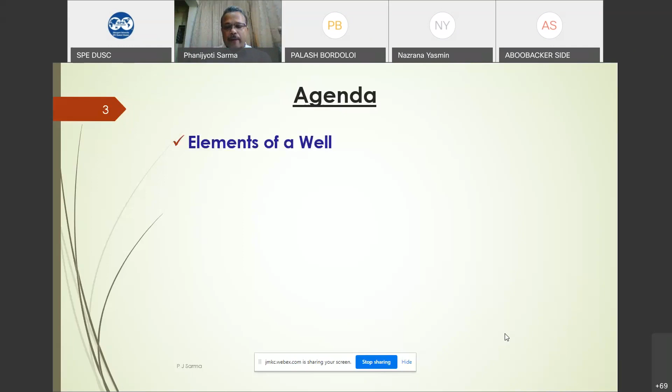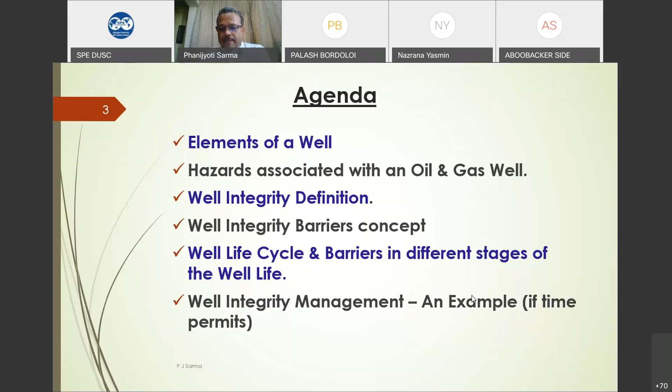The well integrity definition, well integrity barrier concept, well life cycle, and barriers in different stages of the well life cycle. And finally, well integrity management with an example if the time permits.

When you say annulus, annulus is between the production tubing and the production casing. Hello, am I audible to everybody?

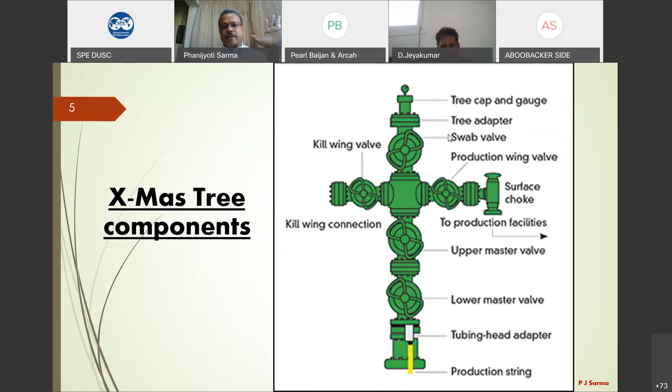So before going to well integrity and barriers, we also need to know what are the hazards associated with an oil and gas well. Unless we know the hazards, we will not be able to do the mitigation process. So it is very essential to know what hazards are associated with the oil and gas well, and then based on the hazards, we make the mitigation plan, the barriers, and the well integrity concept.

So one of the hazards associated with oil and gas is the pressure. And when we talk about pressure, which pressure are we talking about? This is the formation pressure, wellhead pressure, or the pumping pressure during the various stages of the well intervention process.

Second hazard could be the temperature. As you go down from the surface to the formation, the geothermal gradient increases, meaning the temperature is increasing. So wellbore equipment has to be capable of withstanding the different temperature regimes during the different stages of well life. During the drilling phase, the well will see cold fluid; however, during the production phase, the well will see hot fluid. So there will be temperature fluctuations, and we need to ensure that our wellbore equipment is robust enough to handle the temperature hazard.

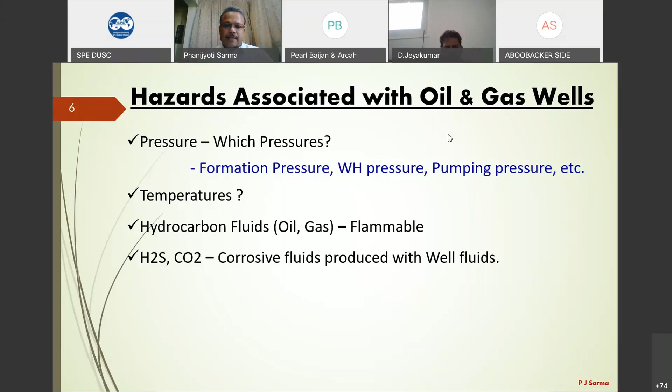Other hazards include the hydrocarbon fluid itself. These fluids are volatile, these fluids are flammable. On top of that, some formations produce corrosive fluids like H2S or carbon dioxide, which are not only corrosive but also poisonous and a health hazard. We have also observed that some formations produce naturally occurring radioactive material, for example barium sulfate, which is also a health hazard.

Drilling fluid, when we are drilling a well, itself consists of various chemicals which are hazardous to the people and hazardous to the equipment we are using. The stimulation fluid could even be acid. So these are the hazards, and based on these hazards, our well should be designed in such a way that it is capable of handling the hazard, and we have the right barriers in place.

So here is a pictorial representation of some of the hazards. You can see an old well which is not connected, meaning it is not producing, probably abandoned, and you can see certain parts are missing—look at the wellhead, no annulus valve is available. However, I can clearly visualize that the production packer is holding, and that's why there is no leak from the annulus side; that's my guess. And if you look at the production side, there is an oil spill happening, and the whole environment is creating a hazardous situation.

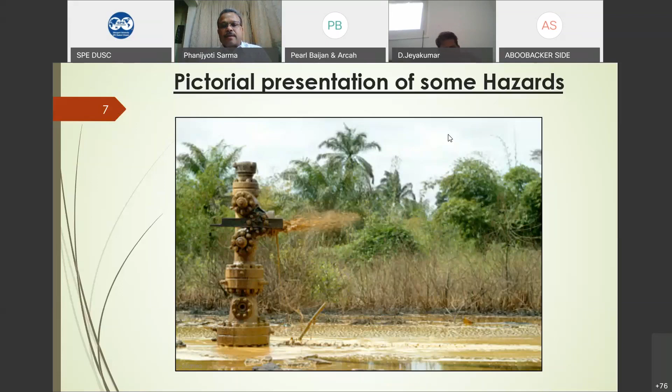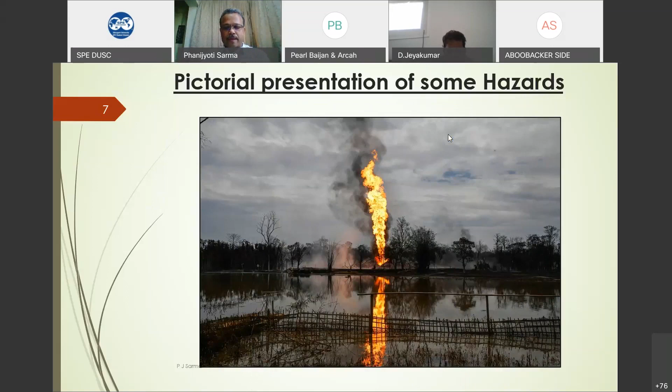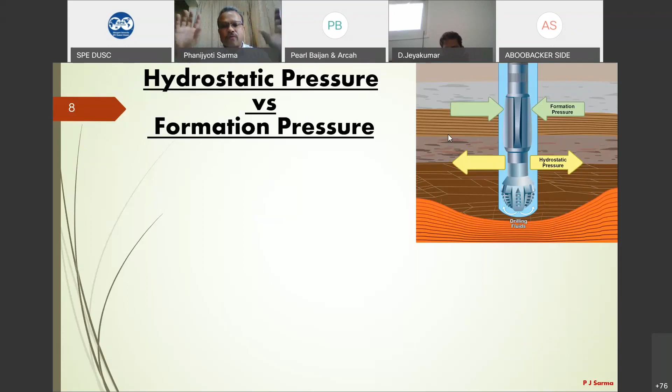Next, the hydrostatic pressure and the formation pressure. The formation is always trying to come up, and hydrostatic pressure acts during the drilling phase. So we have to ensure that our hydrostatic pressure overcomes the formation pressure, so that we can control the formation and the well without allowing the formation to flow to the surface during the drilling phase.

This is a simple calculation for the hydrostatic head. So how do you estimate your mud weight? It's the true vertical depth multiplied by the mud weight in ppg, multiplied by the constant factor 0.052, which gives you the hydrostatic pressure in psi. That's how you can estimate the mud weight required to successfully drill a certain formation.

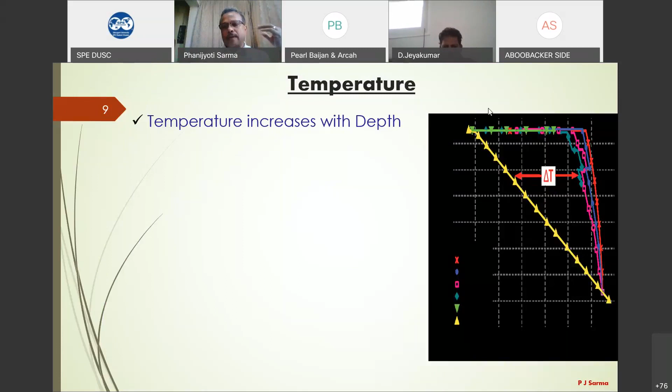Temperature increases with depth, as you can see in this graph. The yellow graph is the geothermal gradient, and it is gradually increasing from the surface to the bottom.

But during the production phase, all the wellbore equipment will be exposed to the production hot fluid. As a result, the temperature in tubing and in different annulus, all the metallurgies, will be increasing, and that is depicted by different curves over here.

What does that mean? Our well equipment will be exposed to different temperature regimes at different points in time: cold fluid during the drilling or intervention time, and hot fluid during the production time. Our equipment has to be capable of handling such a harsh environment, which needs to be considered during the design phase itself.

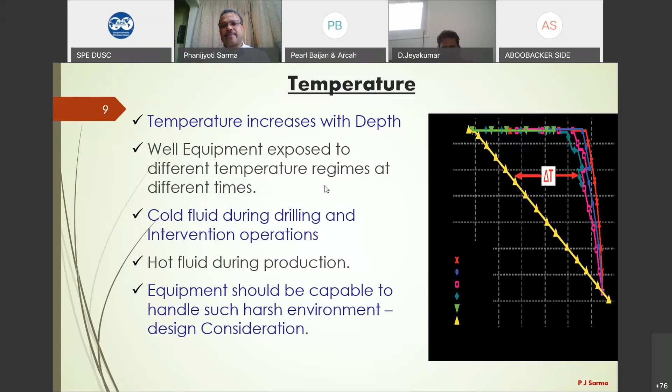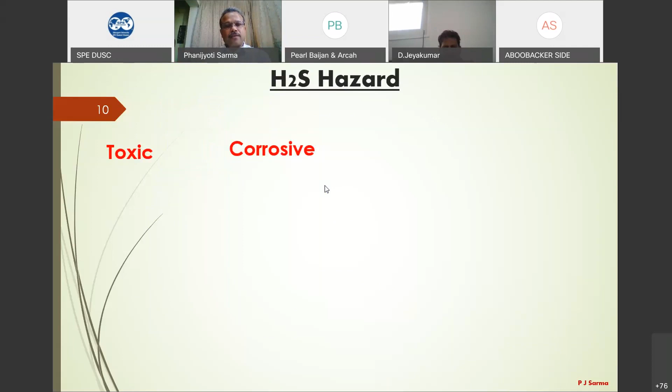H2S hazard is very toxic and deadly. It is also corrosive, and H2S can corrode all the equipment if it is not properly designed. It is also flammable, so if you ignite H2S, it produces sulfur dioxide, which is again a health hazard.

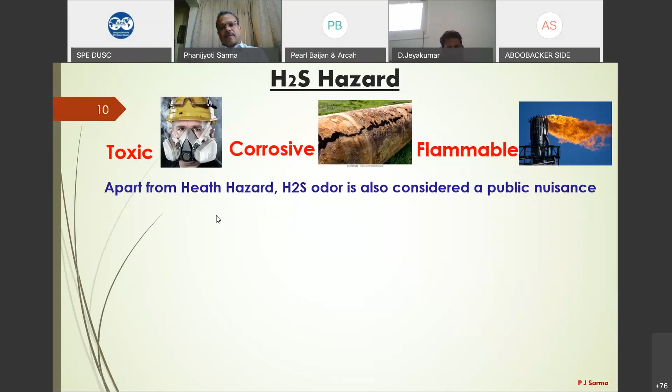The smell is like rotten eggs, and you can smell it only if the H2S concentration is less than a certain percentage.

If the H2S concentration is less than 10 ppm, people can work in that environment for up to close to about 8 to 10 hours.

However, if the concentration is between 10 ppm and 15 ppm, it is called moderately dangerous, and people can probably be exposed in this environment for not more than 2 hours.

But as soon as the H2S concentration increases beyond 15 ppm, then it is dangerous.

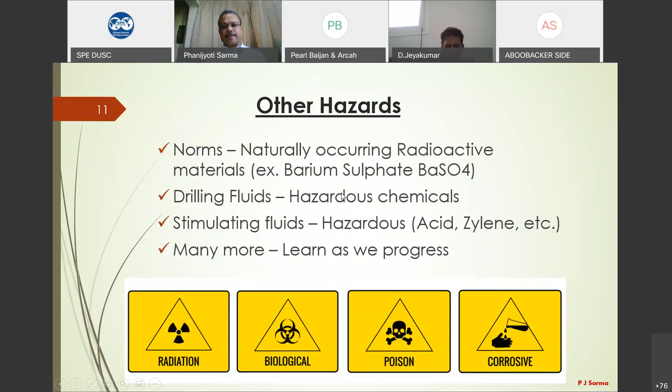Other hazards, as I talked about, include NORM (naturally occurring radioactive materials), drilling fluid, stimulation fluid, and many more. As we progress, we will be learning more. So that covers the hazards and the consequences of the various hazards.

Now, what is the well integrity definition? There are different definitions of well integrity. As per NORSOK D-010, well integrity is defined as the application of technical, operational, and organizational solutions to reduce the risk of uncontrolled release of formation fluid throughout the life of a well.

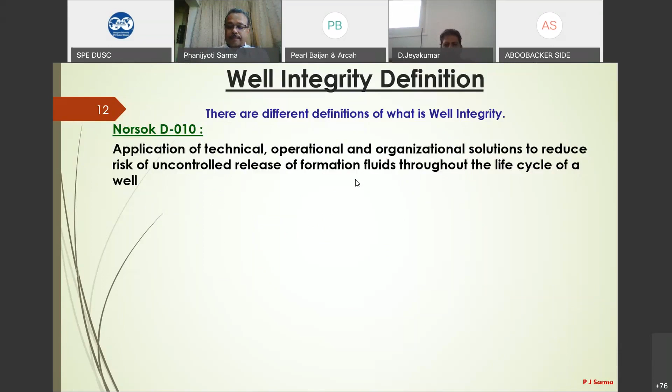As per ISO, well integrity refers to maintaining full control of fluids within a well at all times by employing and maintaining one or more well barriers to prevent unintended fluid movement between formations with different pressure regimes or loss of containment to the environment.

OISD is an Indian regulation. It defines well integrity as the instantaneous state of a well, irrespective of purpose, value, or age, which ensures the veracity and reliability of barriers necessary to safely contain and control flow of fluid within or connected to the well. So in a nutshell, the well integrity definition refers to containment of hydrocarbon fluids by having the appropriate barrier.

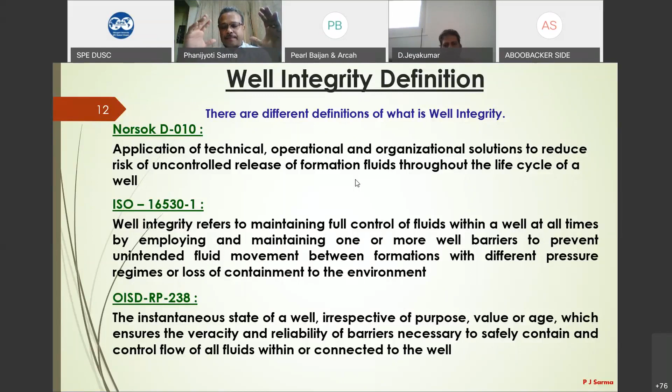In the subsequent slides, we will be talking about the barriers. As NORSOK and other standards describe, the well integrity barriers are the technical barrier, which is the well itself, the plant; the operational barrier, the procedures; and the organizational barrier, the people.

It is not at all possible to have zero loopholes; there will be loopholes in the technical barriers, in the operational barriers, and the organizational barriers. However, if all these loopholes get aligned, then the reservoir and all hazards will be exposed to the environment, and the accident happens.

Because of such failures, various blowouts and incidents have occurred, one of which was the Macondo Deepwater Horizon. It happened in 2010. 3.19 million barrels of oil spilled into the Gulf of Mexico, 11 people lost their lives, and there was a huge financial loss of $65 billion US.

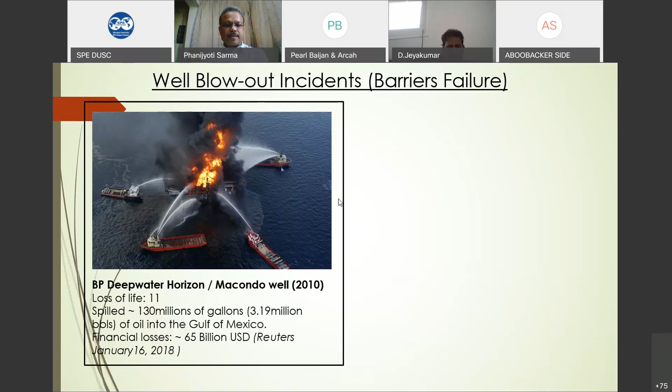So there are many instances of well integrity barrier failures while working on or operating a well. We need to have the barrier concept very clear, and we need to have the process in place so that at all times we maintain the barrier. That is where the concept of the well integrity barrier comes in.

So what is a well barrier? A well barrier, in general, is an envelope of one or several dependent wellbore equipment, preventing fluids or gases from flowing unintentionally from the formation to another formation or to the surface. And at all times, we need to have two barriers in place.

I think some noise is coming from somewhere.

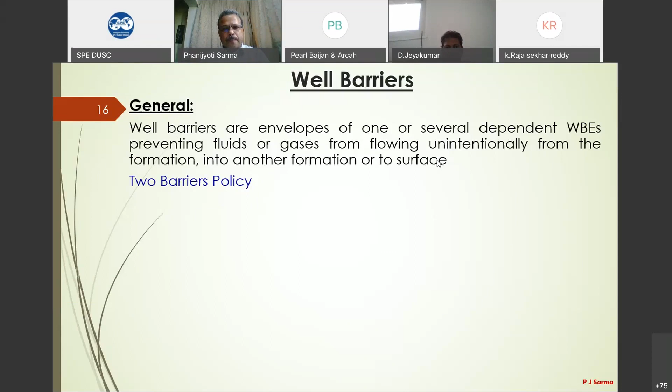Okay, so barrier types: the primary, the secondary barrier. What is the primary barrier? It could be the fluid column, or it could be a mechanical barrier which provides protection against unintended flow of the hydrocarbon.

The secondary barrier is activated when the primary barrier fails. That means when the primary barrier fails, the hazard is coming through the primary barrier, and the secondary barrier now gets activated and protects.

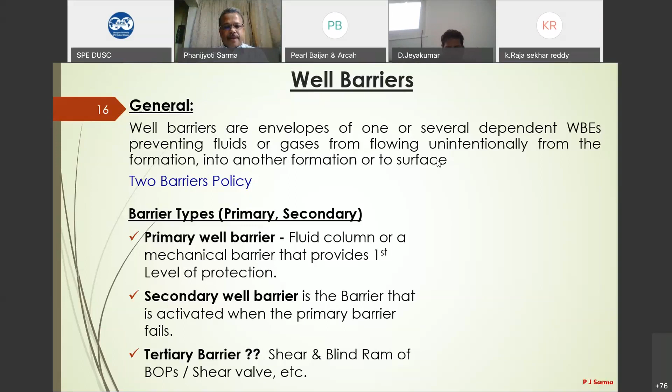There is another barrier which is called the tertiary barrier. Tertiary barriers are nothing but the shear and blind ram of BOPs or shear seal valve, and these tertiary barriers are used during well intervention, be it rigless or rig, during the drilling time, during the workover time, or during the well intervention time.

So well, the formation is always trying to come out once the barrier has failed. And what are the barriers? The casing, the cement, the wellhead. During the drilling time or during the intervention, the BOP and the rams, the tubular itself, the safety valve - it could be the downhole safety valve or the surface safety valve. And choke and kill line valves during the drilling or intervention time, and Christmas tree valves during the production time.

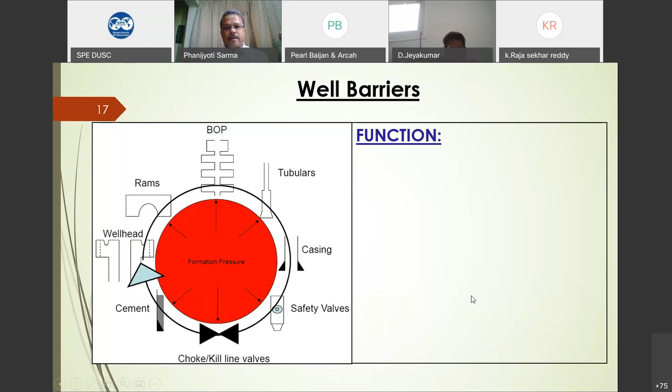So the function: it prevents unintentional flow of fluid from the formation to another formation or to the surface. That is a function of the well barrier. The second function is shutting the well during an emergency situation. And the main function is it secures the well integrity. When we talk about well integrity, we are talking about the well health.

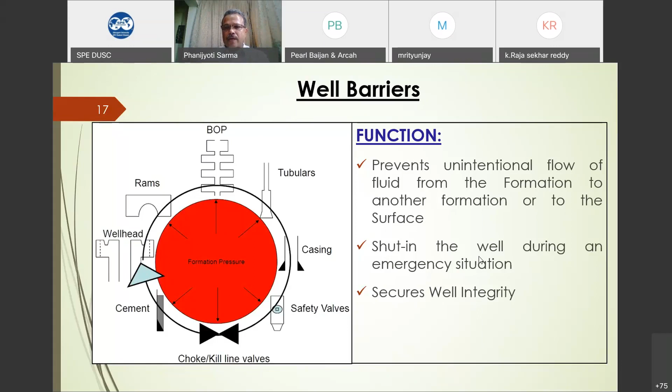Now the well undergoes different life cycles. As I said, the well life cycle starts at the design phase and it ends in the well abandonment phase. In the design phase, we need to define the various parameters based on the hazards. Once the well is designed, it goes for construction, using the rig to construct the well. That is the second phase of the well life cycle.

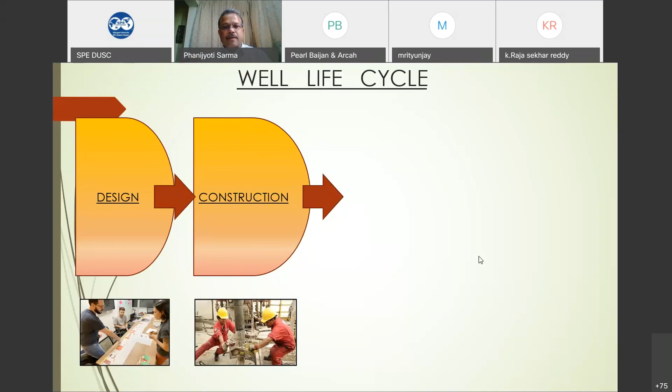The third phase, once the construction is done and completion is put in, is the production phase, and this is the longest phase of the life. Various interventions are done either to enhance production, maintain the well, or rectify certain mechanical failures. Once the well life cycle ends, it goes for abandonment, where we need to permanently abandon the well. So the well life cycle starts at the design phase, then gets executed in the construction phase. The longest life is the production phase, and then the abandonment phase.

Now, during the various different phases or stages of life, the barrier concept changes. So I will go through the various stages of well life and what are the barriers.

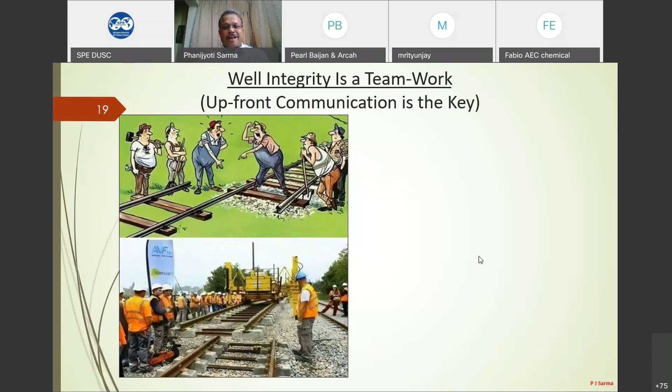Well integrity is teamwork. It is not just the job of the well integrity engineer, and people cannot work in silos. If you work in silos, this could be the end result - like the cartoon, and it is not just a cartoon, exactly this kind of situation has happened in real life. So it is an integrated and interactive approach consisting of drilling engineers, completion engineers, the subsurface team, the surface team, and the service providers.

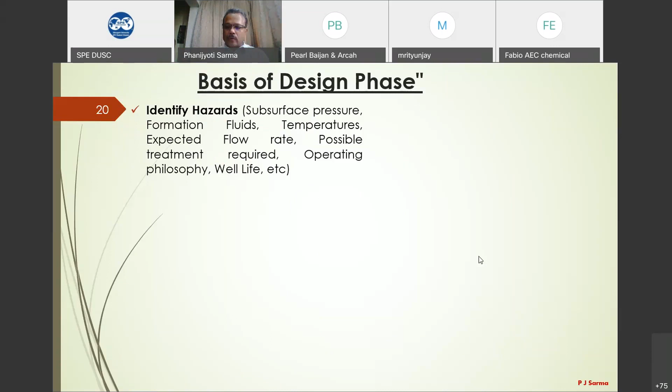So the design phase - what do we do? In the design phase, we need to identify the various hazards: subsurface pressure, what formation fluids we are going to handle, the temperatures, expected flow rate, and possible treatment required during the well life cycle. Also the operating philosophy - once we identify the hazards, we identify the philosophy, then we design the basis of well and design the tubing.

Once we design the tubing, then we can design the casing. Our casing should be capable of handling whatever jewelry we are going to put in the tubing. Based on that, the casing size is determined, and based on the lithology and depth, the various stages of casing are designed. The wellhead is designed too. We also need to identify what will be the artificial lift during the production phase, and whether we need any additional treatment to enhance production, maybe fracturing or stimulation. These are the factors that need to be considered during the design phase itself.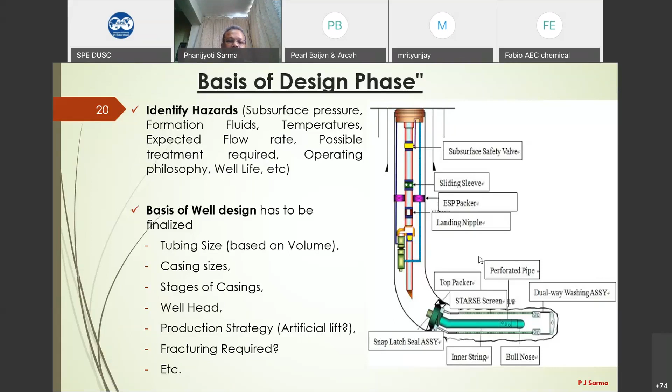And once the factors are identified, then we need to determine the various operating envelopes during the well life cycle. How do we determine the various envelopes? The maximum surface pressure, what we are going to see in case of complete evacuation, in case of any failure. How much pressure do I need to pump to kill the well? Do I need to have a provision for fracturing? If yes, what will be my fracturing pressure? So all these factors determine the maximum working pressure of the wellhead and the tree.

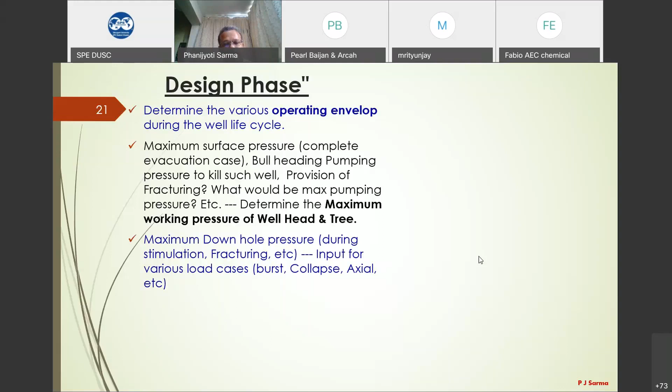And this also will be translated to the downhole pressures, which will be the input for various load cases, for the design of casing, for the design of tubing. And ultimately, by designing, we determine what casing or tubular grade we are going to put in the well.

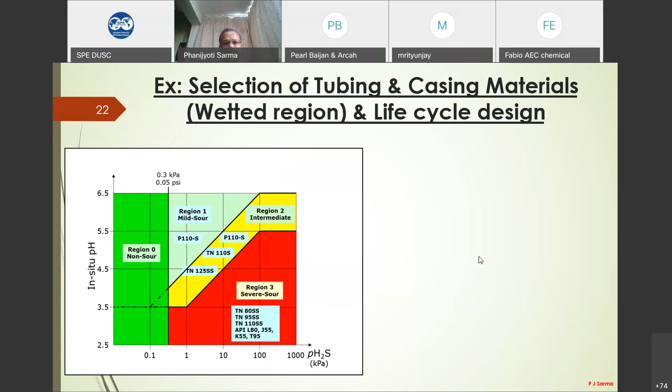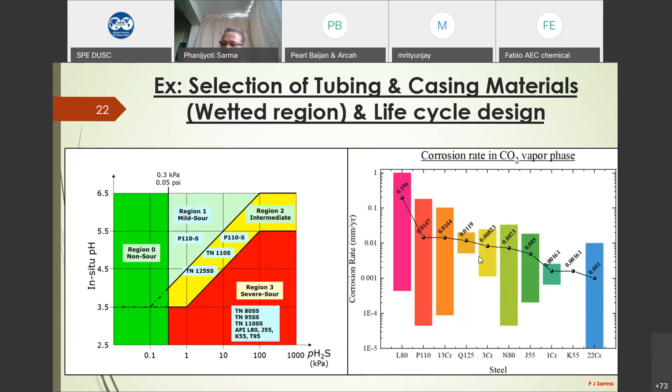Also, the metallurgy of the tubing or flow wetted region will be determined based on the formation fluid and the corrosiveness of the formation fluid, or even during the treatment period. So if the well is producing H2S, depending on the concentration of the H2S, the partial pressure of the H2S, we need to identify which tubing or casing material we need to put into the well. This chart depicts the different regions of H2S hazards, as well as carbon dioxide, which is also a hazard. Different metallurgy has different corrosion rates for carbon dioxide, and based on the well life we are going to design, we need to select the appropriate material for the tubing, casing, and mainly the flow wetted region.

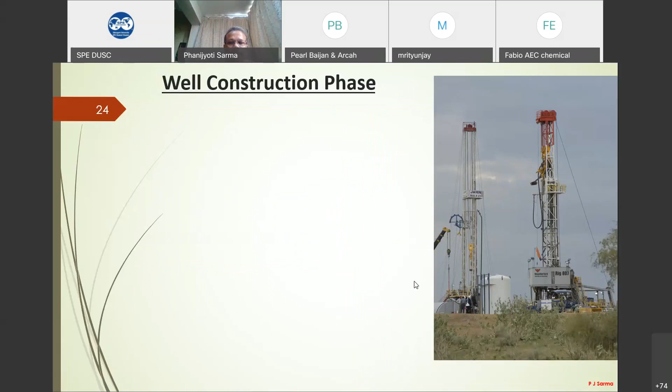So once the design phase is over, we come to the construction phase, the execution phase. In the execution phase, we mobilize the right equipment to construct the well. We need to ensure that well control equipment is certified and function tested, because this equipment will act as secondary barrier during the construction phase. People competency - we need to also define the responsibility of people working while constructing the well, and mobilize the right construction material. Design may say we need this particular casing, this particular metallurgy, however in reality, if that is not available, it may lead to certain disasters. So we need to mobilize the right construction material for constructing the well.

And what is the primary barrier during well construction? In well construction, the mud is the primary barrier. However, always remember that mud is considered a barrier only if it can be monitored and conditioned. If that provision is not there, mud is never considered as a barrier.

And the secondary barrier is the BOP. BOP has to be certified, function tested, and the barrier envelopes are casing, cement, wellhead, etc. So in the next picture, you can see during the well construction phase, the primary barrier is always the fluid column. And the secondary barrier is the casing, the cement behind the casing, the wellhead, the high pressure riser, and the drilling BOP. So that's the barrier concept during the construction phase.

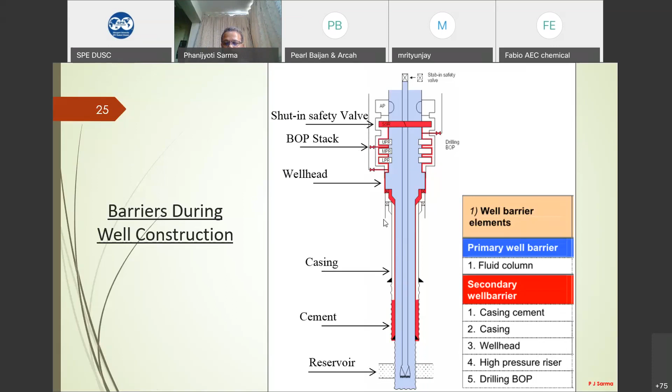Now, when you go to the next phase, the barrier concept changes. But before that, once the well is constructed, well acceptance needs to be carried out by verifying the barriers. This is the job of well integrity, the technical authority, or a designate. The team will verify the design versus the construction equipment. Sometimes in real life, design specifies one material, and in reality something else has been put in, maybe based on availability or sometimes by mistake. I have found similar kinds of deviation happening in my career. So we need to identify, verify the barriers, and ensure whether this well is acceptable or not.

If there is a deviation, then risk and mitigation analysis needs to be carried out. This analysis will determine whether it is acceptable or not - it may be acceptable, or acceptable with certain controls in place. Then a dispensation has to be formulated with periodic review to decide the further course of action. And if the deviation is not acceptable or not manageable, then what is the next step? We need to plug and abandon the well.

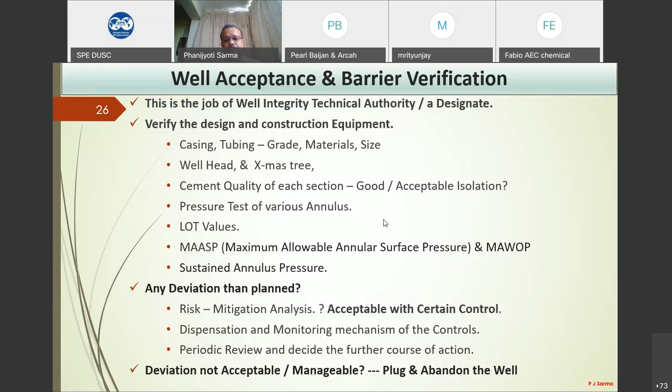So that was the barrier concept during the well construction phase. Now well production. Once the well is constructed, it is put on production. So during the well production phase, what are the barrier concepts?

Production casing below the production packer is a primary barrier. The cement behind the casing below the production packer is the primary barrier. The production packer itself is a primary barrier. The tubing, the completion string, is a primary barrier.

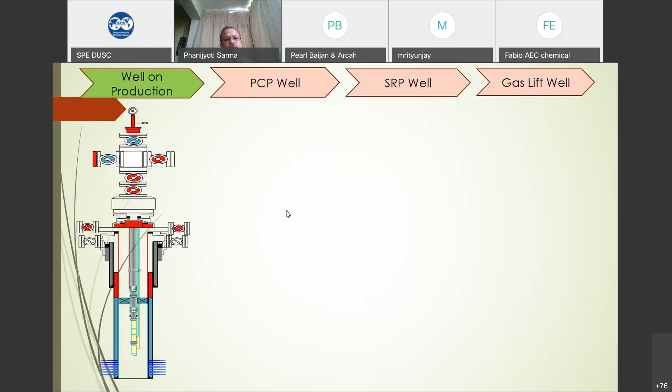So, this is the same one. However, this barrier concept is only for the naturally flowing well. But the well may not be naturally flowing, so you need to put in certain artificial lift. Then your barrier concept also changes depending on the surface equipment.

So in a PCP well, the stuffing box aside, remaining are all the same as the production barriers. What are the changes? The Christmas tree changes basically. So your primary barrier is the stuffing box and the ball valves towards the other side, and the secondary barrier is the BOP, the PCP BOP, and the flowing side.

In a sucker rod pump, the same primary barrier is the stuffing box. It is as similar as the PCP wells.

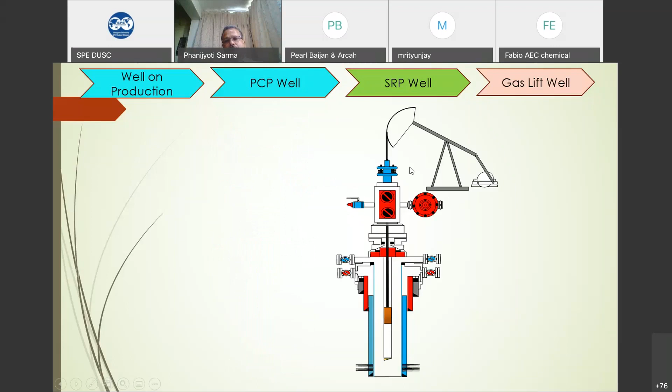In a gas lift well, it is a little bit different.

Hello? Yeah? Anything you want? Hello? Okay, no, I think it is. Hello? Am I audible? Yes, sir. So we can hear you. Huh? Yes. So am I audible to everybody, right? Fine, you go ahead. Okay. All right, thank you very much.

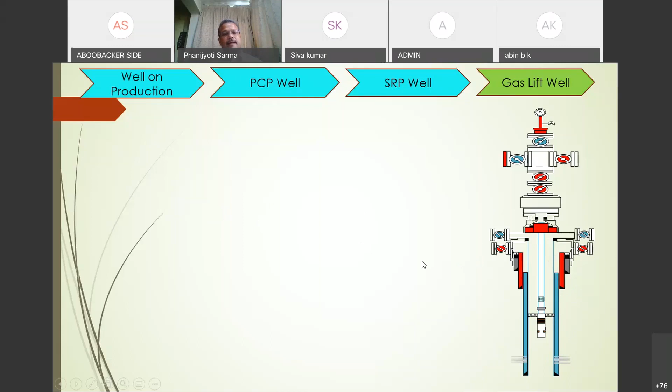So in a gas lift well, the barrier concept changes particularly because we are inducing pressure in the annulus, and that's why the annulus valve becomes the primary barrier. And the casing, the production casing also becomes a primary barrier. Remaining is as it is, as good as the production wells.

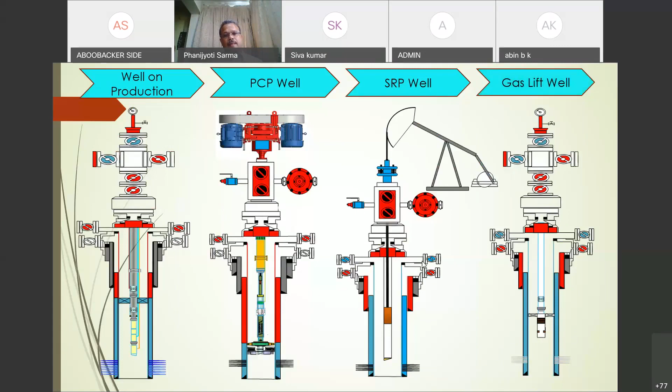So these are the barrier concepts during the production phase. Now, as I said, the production phase is the longest phase of a well. So in order to maintain the health of the wellhead or the Christmas tree, we need to carry out the preventive maintenance, as we normally do with our car.

So we have to do regular preventive maintenance of our car. Similarly, we need to maintain all the equipment in the well so that at all times the two barriers are available.

And the other thing is that we need to also do certain monitoring so that we ensure there is no barrier issue between the tubing and casing, or between the casing and casing. So how do you do that? That is by regularly monitoring the annulus pressure.

Then during the production phase, we intervene in the well for surveillance purposes to collect the data. It could be production surveillance or it could be integrity surveillance.

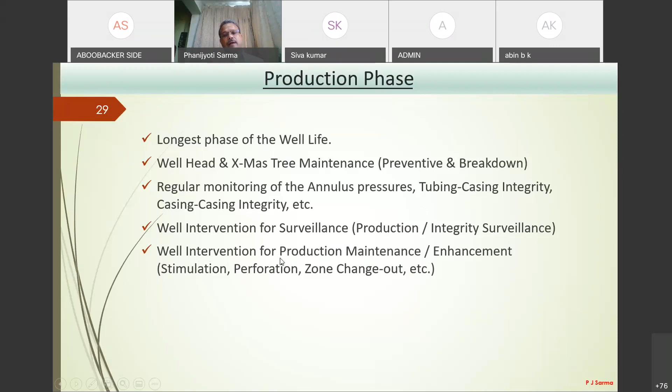We also intervene the well for production maintenance or production enhancement. So we do stimulation, perforation, reperforation, or maybe zonal change out. Intervention is required during the production phase. Or sometimes we need to do rig intervention, which is workover, in order to repair the integrity job, or do any other production related repair.

During the production phase, basically the longest phase of the well life, we need to do various maintenance as well as various intervention. That's why during intervention, the barrier concept changes from the production phase. So this well is depicting the barriers during the flowing condition.

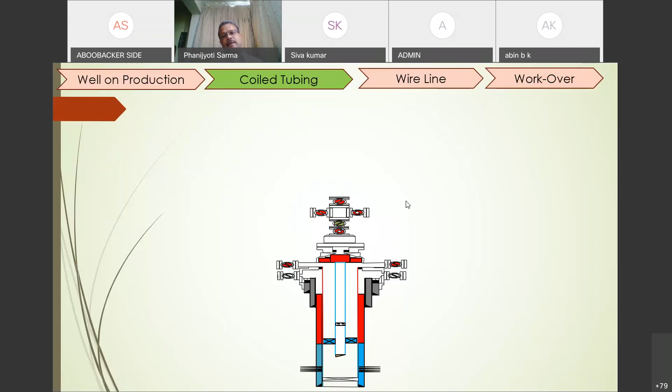Now this well needs to be intervened, say for example with the coil tubing. So what changes are we doing? We are closing some of the primary and some of the secondary valves, which are swab valves, master valves and flowing valves. Then we remove the secondary barrier on the tubing side as well as the cap side, the swab side, and then we rig up the coil tubing equipment, pressure control equipment. Also we rig up pumping to the tubing side.

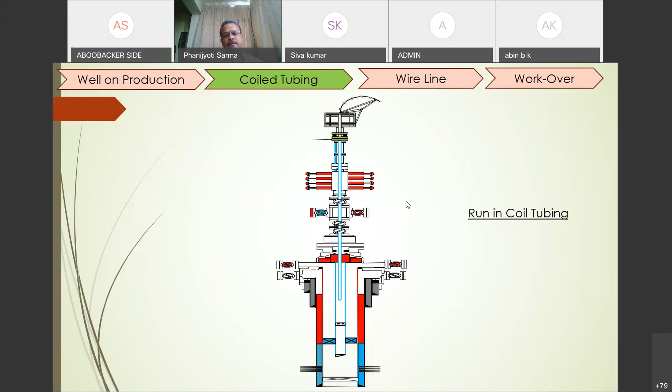So now in this intervention process, the barrier concept changes. The bottom section barrier remains the same, whereas the coil tubing itself becomes the primary barrier. The stripper is the primary barrier of the coil tubing intervention. The lubricator is a primary barrier, and the coil tubing BOP is a secondary barrier. So you see the difference.

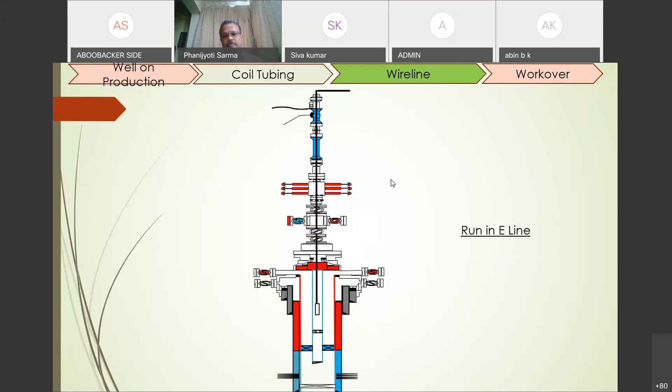Similarly, when you intervene with the wireline, it could be E-line, it could be slick line. So you rig up your E-line equipment, and the barrier concept changes. Now in this case, the grease injection port becomes a primary barrier, the lubricator becomes a primary barrier, and the E-line BOP becomes a secondary barrier.

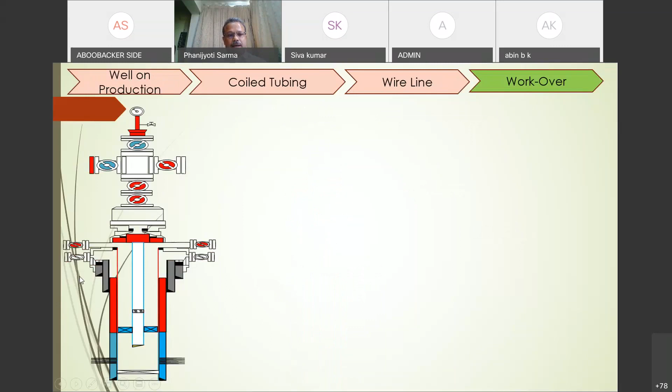Now coming back to the workover phase. Again, this one is the production phase barrier, so we will change the barrier while going to do a workover. How do you do it? We set the plugs. And before setting the plugs, actually we have to change the wellbore fluid.

So the kill fluid becomes the primary barrier, or the brine, whatever we use for the workover, which needs to overcome the reservoir pressure. This becomes the primary barrier, and we put an additional mechanical barrier in the tubing or in the tubing head hanger, and install the BOPs. Now the BOP becomes the secondary barrier, and then we pull out the tubing and carry out the workover operation.

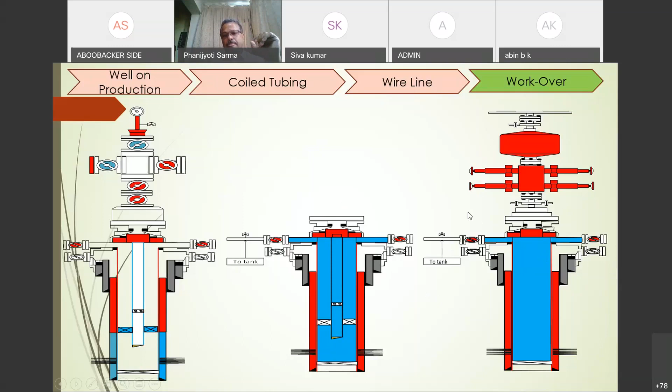So the barrier concept changes from production to workover, or production to coil tubing, or production to wireline. These are the production phase.

Our next phase is the permanent abandonment phase. What is permanent abandonment? It is a well status where the well or part of the well will be plugged and abandoned permanently, with the intention of never being used or re-entered again.

Why do we need to do permanent abandonment? To prevent hydrocarbon leak to the surface. We have seen in one of the pictures, hydrocarbon leaking in an abandoned well. So to prevent this, and to make it a non-usable well, we need to do the permanent abandonment.

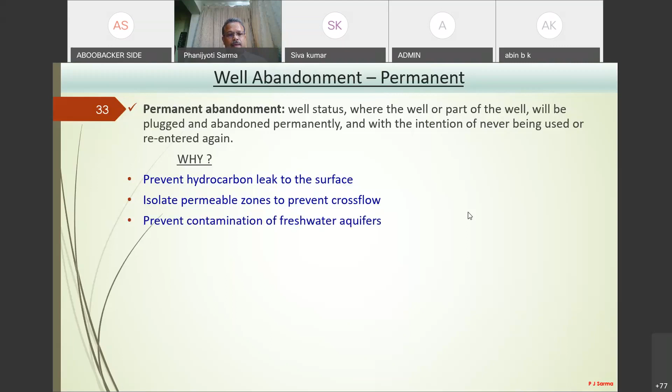It isolates permeable zones, prevents cross flow, and prevents contamination of the freshwater aquifer. It enables removal of the mechanical installation below the surface or the seabed. And obviously, every country has their own regulatory requirement, which is also why we need to permanently abandon the non-usable well.

And what is the application? This permanent abandonment is applicable to the exploration and appraisal well, because by definition, exploration means you are exploring and identifying the prospect, but the well is never going to be used for production, except in some cases of course. Similarly, the appraisal well is used to collect data, and based on the appraisal well and exploration well, you prepare your development plan.

And you prepare your development well. At the end of the economic life of the field, you need to abandon the well, or any other well which has certain issues, or is not operated or not required for the purposes, needs to be abandoned.

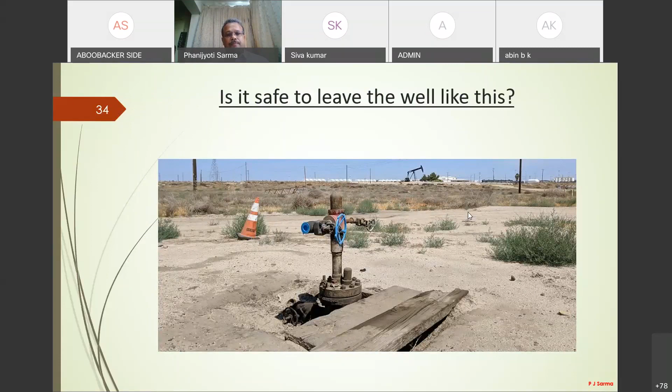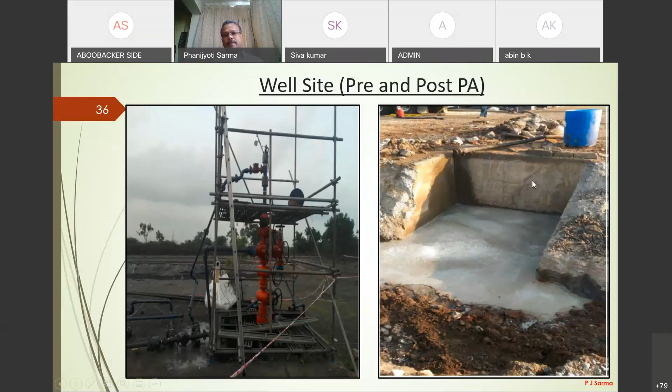So this one was before the plug and abandonment, and for statutory requirement purposes, this was an exploratory well. We wanted to abandon this well, and we used the rigless abandonment process without using the rig. And finally, this was the final picture, the final status of the well.

So these are the barriers we talked about, at different stages of the life.

Now, a bit on well integrity management system. In principle, the well integrity management system should assure that well integrity is maintained throughout the well life cycle by the application of a combination of technical, operational, and organizational processes.

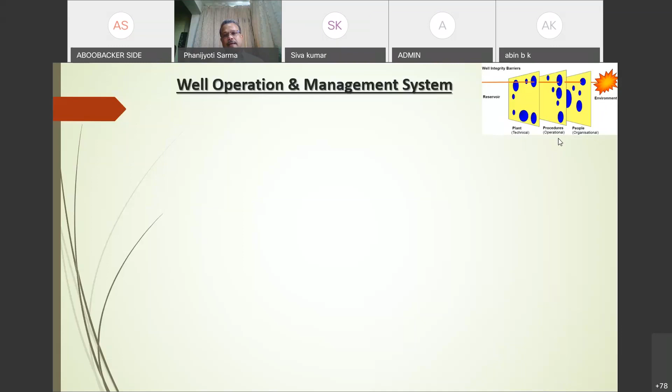So well operation and management system, we talked about. Remember these slides I showed at the beginning of the presentation. There are three barriers: the plant or technical barrier, which I've mostly been talking about. Over and above, we have operational barriers, which are about policies and procedures, and also people barriers, so that our people dealing with well operations are competent enough to deal with and understand the barrier concept.

So guidelines, I have briefly touched upon, but there are several guidelines. The OISD guideline is there for India. NORSOK guidelines are there. API guidelines are there. ISO guidelines are there. These are the standard guidelines evolved throughout the development of the industry.

Based on this, every company needs to define their policies on safety procedures, process safety management, well construction and operation minimum standard policies, well integrity management policies, well barrier and compliance policies, and so on.

And based on the policies, every company also needs to define various procedures so that wells can be operated and managed safely. Some of the procedures could be well design and cementing procedures, well operation procedures, annulus pressure management procedures, well intervention procedures. When I talk about well intervention procedures, it's a generic term I am using.

It could be coil tubing intervention procedures, because every well intervention procedure is different depending on the equipment type. For the rig, the completion procedures or rig intervention procedures are different than the coil tubing procedures or the E-line procedures. So every company should have proper, robust procedures in place.

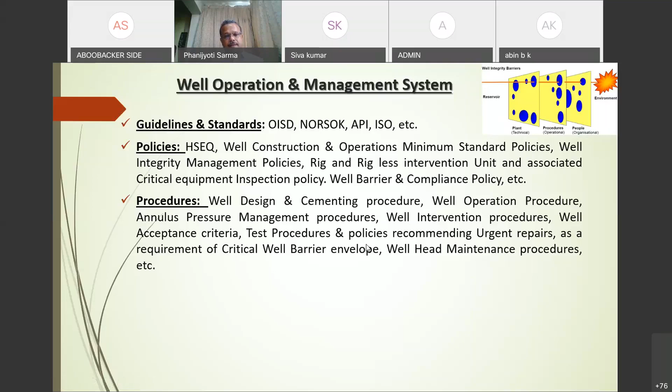Wellhead maintenance procedures also need to be there so that you regularly maintain your wells. And apart from this, you should have a management system in place.

This talks about having a permit to work system. You may also have the well operation workflow process management system. And in case of any variations or changes, you must have the dispensation and change management system.

Also, management should have a competency management system so that they can develop people, with a monitoring mechanism to ensure their people and procedures are robust enough to deal with well operation and management.

So people competency, as I said, the barrier concept starts at the beginning. Barrier concept is different during the drilling construction phase, and again, in the production phase, barrier concepts are different. So the people working in the field or designing should be competent enough to do the job. Well integrity management is another competency required.

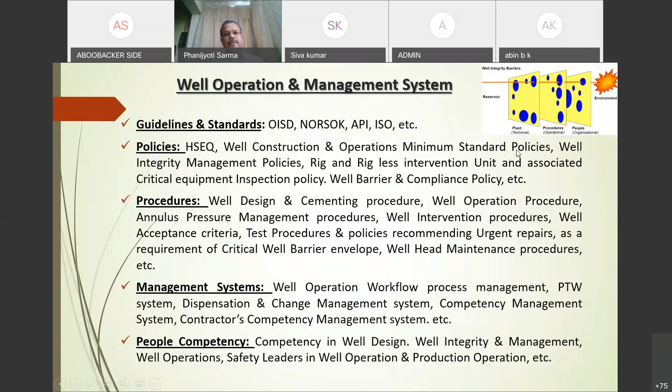So these are, in nutshell, the well integrity, well operation and management system. In case of any deviation, we need to carry out certain diagnostic or mitigation. And how do we do it? We need to follow a certain process.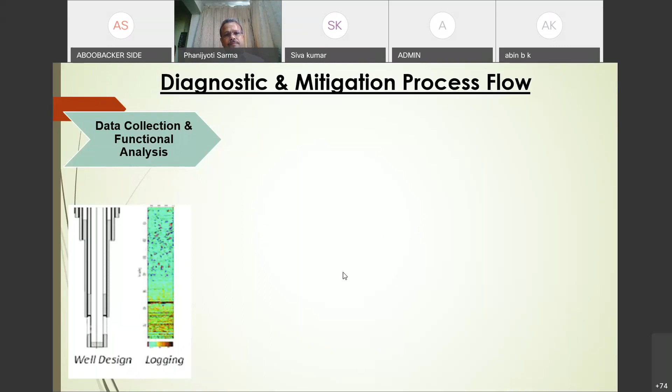The first process of the diagnostic is the data collection and the functional analysis. We ensure that the barriers are put for certain functions. Are these barriers capable to carry out the function? And the other data collections like annulus pressures, or we need to do certain investigation log.

Then comes the scenario modeling. In the scenario modeling, we do identify the risk. So once the data is collected, we identify the risk. What are the risks associated? And once we identify the risk, it has to be quantified. I'll come back to this risk quantification, and once the quantification is done, then we need to have a risk mitigation action plan.

And the risk mitigation action plan, if we find that these risk mitigation action plans bring the risk down to a manageable condition, then we operate the well. Otherwise, we do not operate the well. So in risk mitigation analysis, what are the key elements?

We identify the risk or hazard, and also identify the impact or consequences. It could be negligible or it could be catastrophic. And what are the likelihood of that occurrence? It could be rare or it could be almost certain.

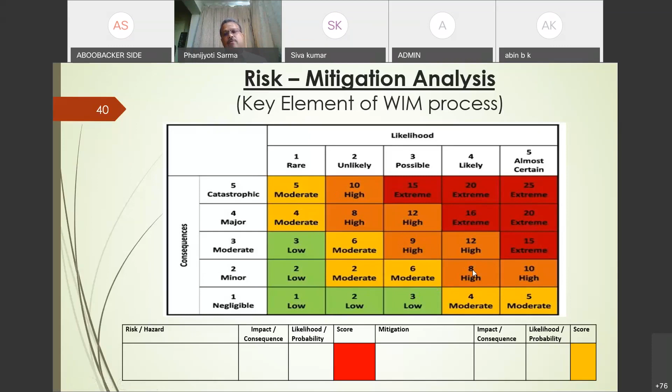With the mitigation process, you reduce either consequences or reduce probability. And based on the final score, if it is coming below, coming to green level or yellow or high level, then with a certain mitigation process or periodic regulation, you can still operate the well.

So towards the end, I'll put one of the cases. Say for example, we are putting the cement behind the casing, and first of all, we need to know why do we need to put the casing, put the cement.

So this picture depicts there are various zones, right from the aquifer zones. There may be some coal or shallow gas zones, some other zones which is non-economically producible, or the main reservoir. So we are passing through all these zones by drilling and placing the casing. But we need to isolate behind the casing, so that there is no flow behind.

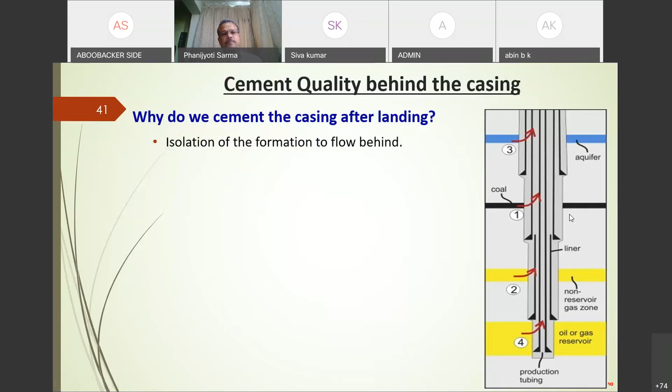So another objective of placing the cement is to prevent contamination of the freshwater aquifer. Right, so prevent formation fluid coming out to the surface. If we do not have any cement, what will happen? The reservoir fluid will come out, or maybe shallow gas will come out. So by placing the cement at various stages against the casing, we prevent the fluid coming out of the surface and ensure that sustained annulus pressure is below MAASP value.

If the isolation is not good, then the outer casing could be exposed to the formation pressure which it is not designed for, and the zonal isolations between the various zones fail. So in case of bad cement, this is design, this is intention. However, while execution, everything does not go perfectly as we plan. So what do we do in case of bad cement?

We do repair the cement job. However, unfortunately, the success rate of cement job is very less. So then what? If you do not want to do cement repairing job, then what? Then we need to identify the extent of damage, and we need to analyze, identify, can we manage by putting some mitigation.

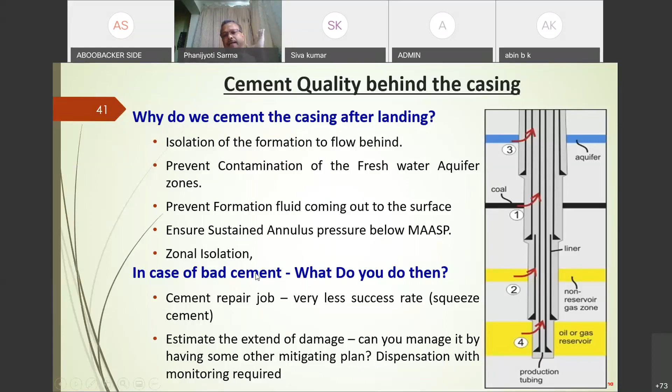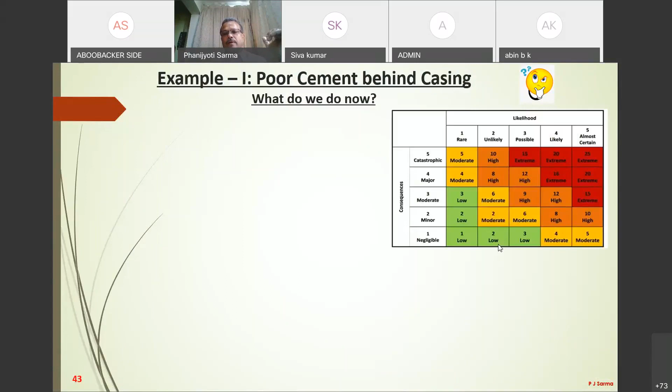These are the qualitative diagnostics. So now, since you have identified that your cement quality is poor, what do you need to do? Think about this. So you need to carry out the risk mitigation analysis.

So what are the consequences? Your cement is poor. The consequences could be, I'm giving only one example: there is a communication to the B annulus. And if the consequence is communication to the B annulus, that means the B annulus pressure, the sustained annulus pressure, might go beyond the MAASP value, maximum allowable annulus surface pressure.

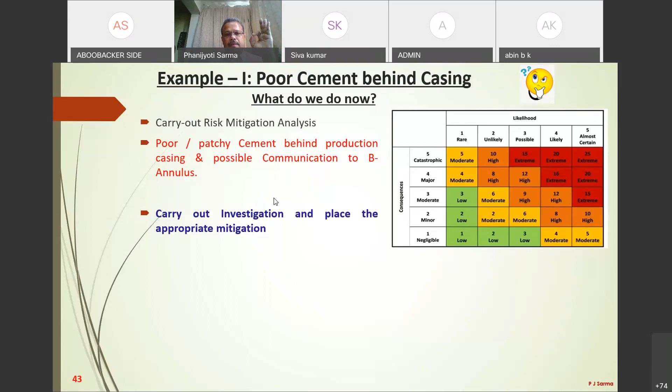So what do we do? We need to carry out the investigation and place the appropriate mitigation. This is where I was talking about the risk mitigation analysis. So what are the risks? The sustained B annulus pressure beyond the MAASP value, and that is because of the poor cement.

What is the likelihood? Depending on the cement quality, the impact, likelihood could be different. But in this case, in the previous case, I could clearly see, except a patch of cement, most of the cement has channels. So likelihood is very likely. So I am giving a score of 4.

And what will happen? What is the consequence? If it is beyond MAASP value, that means casing is going to fail at any point of time. So consequence is also very high, major consequences.

Now we need to do the mitigation. So what are the mitigations? First of all, we identify, we need to do the diagnosis. So we identify and monitor the casing pressure. Maybe that patchy cement is holding the formation pressures, not allowing it to come to the annulus side. So we monitor the B annulus pressure.

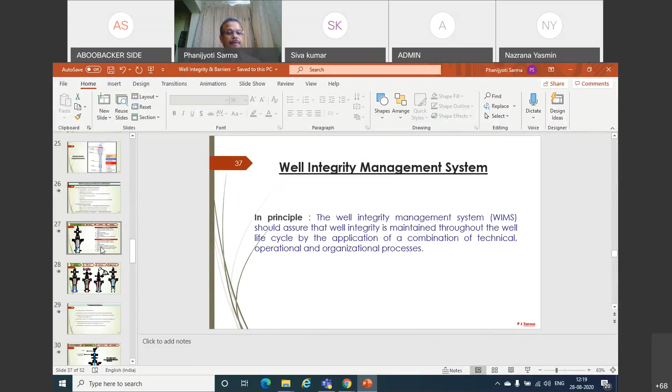During when the well is under production, I think I will go back to the slide so that you can visualize. Just hold on. Okay, so is it visible? Probably not, right? Is my slide visible? Yes, sir.

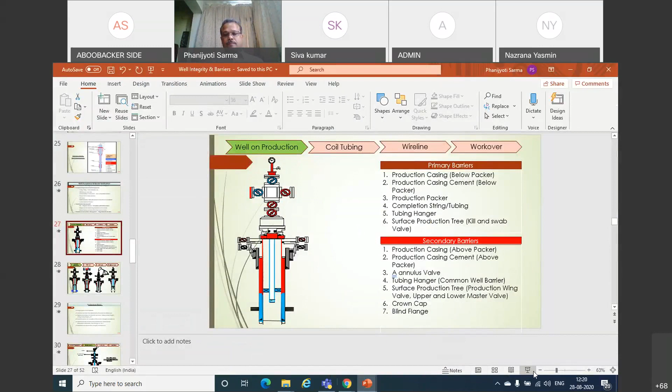Okay, now this is a production well. Right. So in this case, when the well is getting produced, this master valve... you say why the Christmas tree is not considered as a primary barrier. This master valve is not a primary barrier. A primary barrier is any barrier which is always in active condition and not allowing flow to come out of the unintended region. So in this case, what is happening?

The flow is coming from the formation. This bottom barrier is not allowing it to go towards the other zone, so the packer is holding it back. The packer is always active, so this is the primary barrier. And the well is flowing through the master valves and going to the surface facilities.

So what does that mean? These two valves, actually these three valves, are in open condition. Open condition means these are not currently a barrier in the flowing well. What are the barriers? The swab valve. The swab valve is closed, so this is in contact with the fluid while flowing the well, so this is the barrier, the primary barrier. The killing valve is in contact with the flowing hydrocarbon fluid. These are the primary barriers on the Christmas tree.

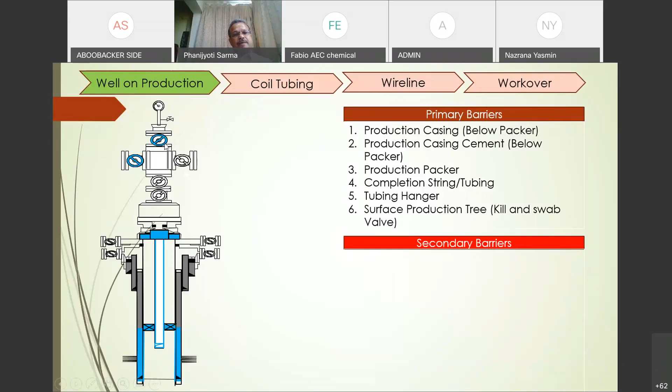Remaining all are secondary barriers. So what does it mean? That if the primary barrier fails, then the tree cap, right, the tree cap or the blind flange on the killing side, that is the secondary barrier. And these are secondary barriers but closable. In case you need to close, then only this becomes the secondary barrier. Am I clear?

Yeah. So we have another question. Yeah.

Please explain about bleed off during the mitigation task, how can we do that? Bleed off during... he's asking to explain bleed off during the mitigation task, how can we do that? Okay, so you are possibly referring to the mitigation plan. I have cited the example, right, that is the B annulus bleed off. Is that correct?

I think so, so he is talking about the bleed off during the mitigation plan. So your B annulus has a sustained annulus pressure which, by monitoring, you have identified is gradually rising and may cross the maximum allowable working pressure. In that case, you have to bleed off by putting this bleed off line either to a flare line or to the production system. You bleed off and then also monitor for the build-up process. Once you establish that your flow line pressure is, say for example depending on distance from the surface facility, it could be 200 psi or anything, but if it is below the maximum allowable working pressure, then you lay the line with the pressure relief valve and connect it to the system. And if it is not, then you connect it to your flaring system or any other system where you can vent it open.